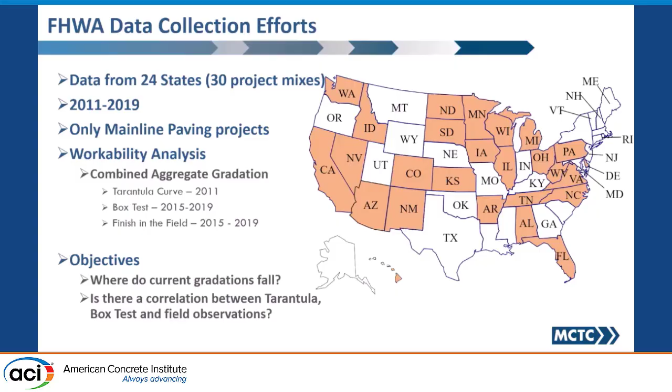So for those of you that are not familiar with the Tarantula Curve, this is not just the new kid on the block, but this is the Elon Musk of concrete gradations. This is something that we've been using for the past 10 years, and we just love it.

So historically, on the concrete side of things, we've always looked at aggregates as coarse or fine. We haven't really put emphasis on combined gradation, and that's what this tool does. Basically, what it is, we would combine all the gradation, and imagine if you're sieving each of the individual sieve sizes.

Once we do that, according to the Tarantula Curve, each of the sieve sizes should meet three different criteria. The x-axis represents the sieve sizes, and the y-axis represents the percent retained, that's the combined percent retained.

The first criteria is each and every one of those sieve sizes should pass, should meet the criteria you see there, the bands that you see there.

The second criteria is the coarse part of your fine aggregate, from number 8 to number 30. If you add it together, it should be between 15 to 40%. Similarly, the fine part of the fine aggregate, from number 30 to number 200, if you add it together, should be between 24 to 34%.

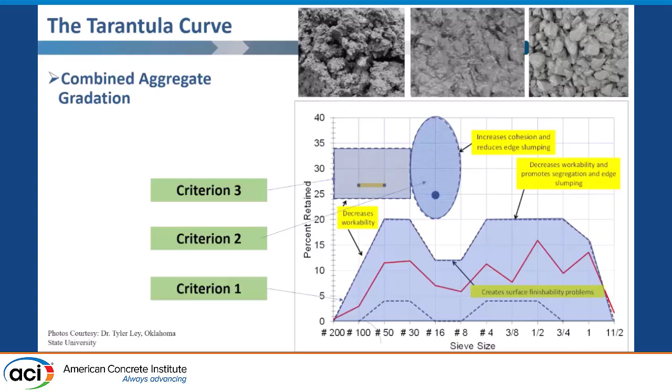Something we've observed is that especially criteria 3 is very, very important when it comes to finishability of concrete.

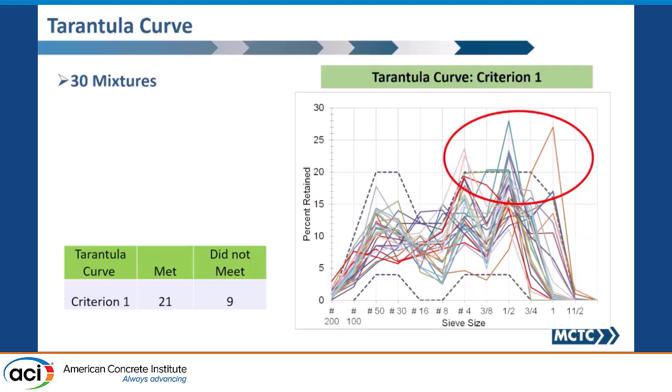When we put all these 30 different gradations together, what we found is actually the majority of them do meet the Tarantula curve. Only 9 did not meet, and even those that didn't, a lot of times it's just one aggregate that's out. So all we really need to do is tweak our blend a little bit and it would fall within the Tarantula curve criteria. The second criteria, the majority actually meet, and it's quite easy — it's very rare that I've seen that criteria not being met.

The third one is basically your fine sand — how fine is your fine aggregate? You want to ensure that you have an adequate amount of fines in your mixes.

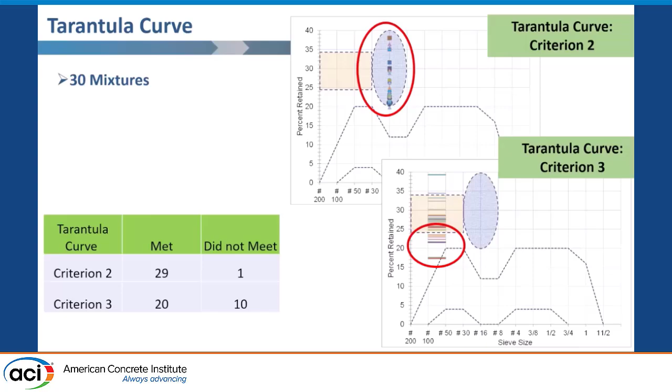But what is the holy grail? Well, the box test is. This is something that's very interesting — it's basically a workability tool that mimics what a paver does. It's a one foot by one foot by one foot box.

You dump concrete into the box up to 9.5 inches, take a vibrator with a certain frequency, insert the vibrator into the box — 3 seconds as it goes in, 1, 2, 3 — and then 3 seconds as you pull it out. Then immediately remove the formwork and you're going to see a cube like that.

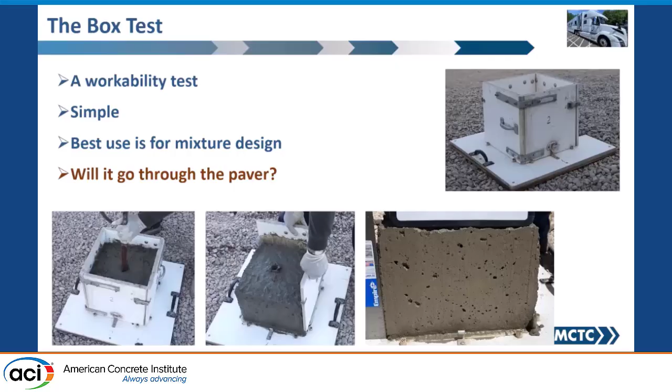Based on the surface of the cube, you can rank it 1 to 4. 1 being ideal from a consolidation standpoint — no issues, great finish, and that kind of thing. And 4 is your nightmare — you wouldn't want to use such a mix.

On the other end of the spectrum, you also have edge slump. Paving mix is very unique in the sense that not only should it be flowable enough where you would not have any consolidation issues, but it should be stiff enough to still hold an edge. So it's like a balancing act.

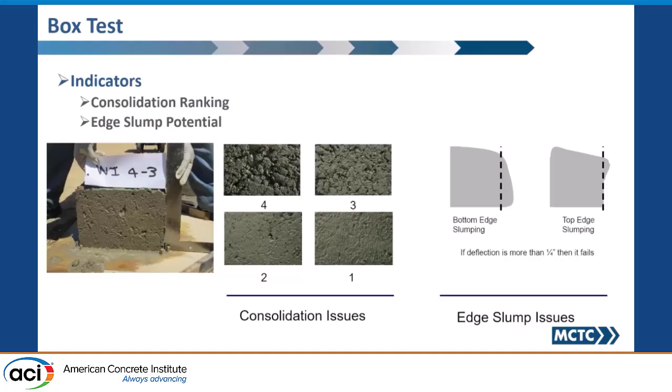If you see edge slump, usually a top edge slump means you have too much admixture or too much water — you should be able to address that in the field. But if you have a bottom edge slump, that means your aggregate gradation, your blend, is not adequate. So no matter what you do in the field, you would still have issues — that's a mix design issue.

With the Tarantula curve, we were able to go back and look at all these 30 different mixes. But with the box test, we actually started using it in 2015 onwards, so we didn't have a chance to run the box test on all 30 mixes. We were able to run it on only 19 mixes.

So of those 19 mixes — what you see on the x-axis is the project number, that may not mean much to you, it's just a project number. On the y-axis, you have the average box number rating, the box test rating.

If you remember, 1 is ideal, right? 1.5 is still good, you can still work with it, no issue. But anything over 1.5 is not ideal. So what I'm going to do is run through a few examples of bad box tests, good box tests, and then the corresponding Tarantula curve for those mixes, along with some photos from the field.

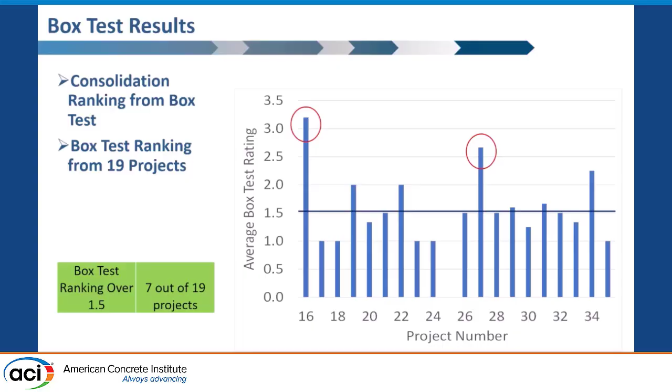So the first one is this project on the west coast of the US. I forget what state it is.

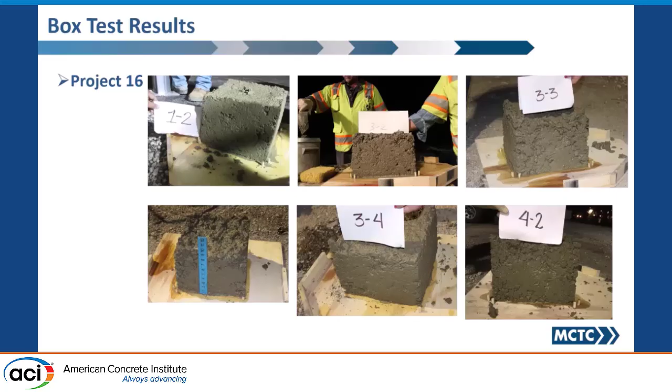When we went to the field, this is what we saw. Now imagine this is a $25 million paving job, right? And this is what we've been seeing consistently throughout the pavement. And again, to show you the box test, this is how it looks.

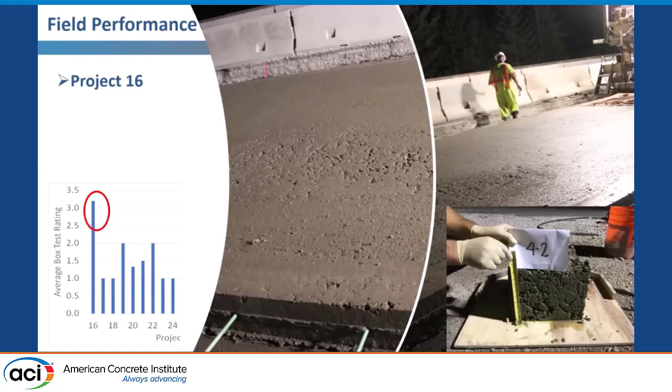So if you look at the reasons why this has happened, well, the mix had a lot of flat and elongated particles, but that's not the primary reason. The primary reason is, if you look at the fine aggregates, they actually have 4 aggregates in their mix. 2 of them are fines, but the fines were not fine enough. So all they had to do was replace one of the fine aggregates with a finer aggregate. That's all they had to do, and it would have solved the problem.

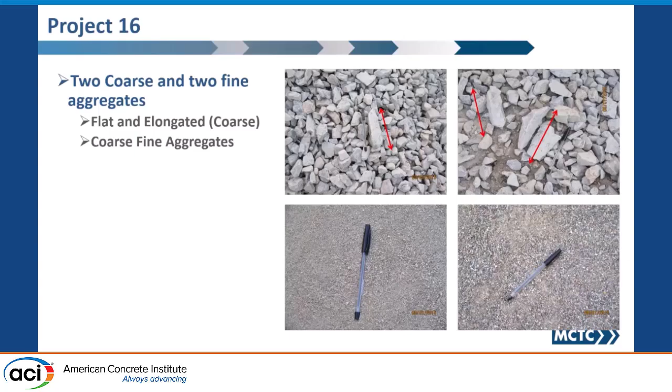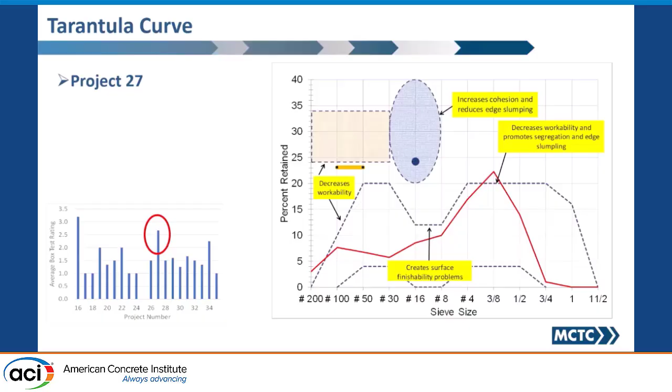Another project, this is also on the West Coast. Again, not enough fines there. It also did not meet the other criteria as well. And this is what we saw.

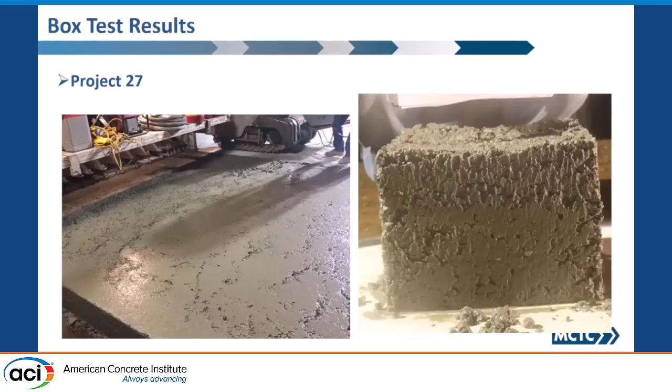Would you want to have this on your job? So you know what the contractors were doing to address this? They were using water literally after every truckload. And that's basically all. What would that do to your pavement? All the good stuff would come up, right?

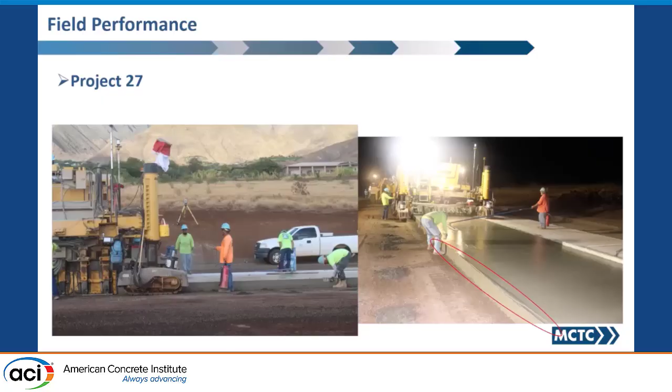And what's going to happen to the durability of your pavement now? So all they had to do is just tweak the mix initially, and they would have addressed this problem.

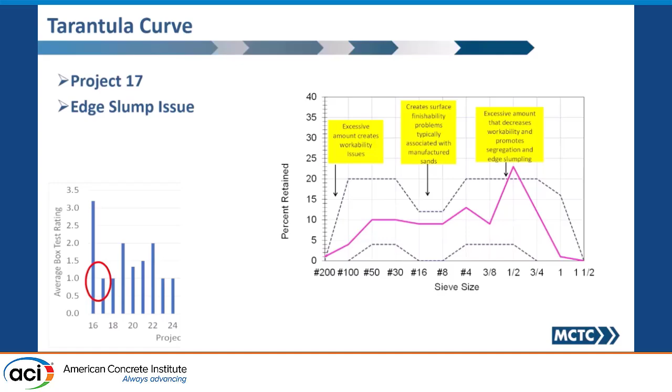Now, on the other end of the spectrum, we have edge-slump issues. Again, another mix where the box rating, the consolidation rating, was great, but the Tarantula curve indicated that you're going to have edge slumping. And sure enough, that's exactly what we saw in the field.

So my point here is, the Tarantula curve gives us an idea. It's a guide for us to design our gradation so that the likelihood of workability issues happening are reduced. But like I said, it's not the holy grail. It's a guide. But to ensure that you won't actually see that in the field, you have to run the box test during mix design.

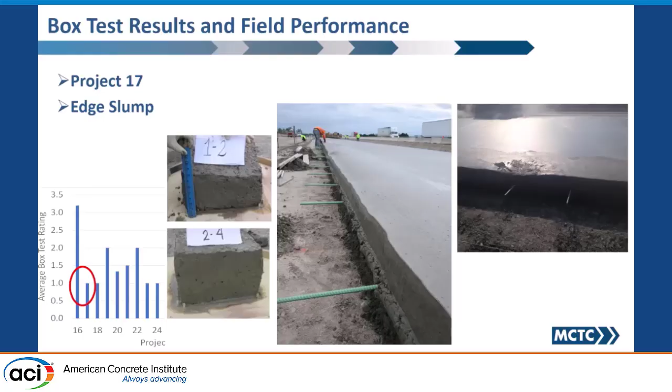And if the box test says everything is good, I'm going to go ahead and submit that mix design to the state or the owner, whoever that is. If not, even if all your other properties are good, I would still go back and redo my mix design.

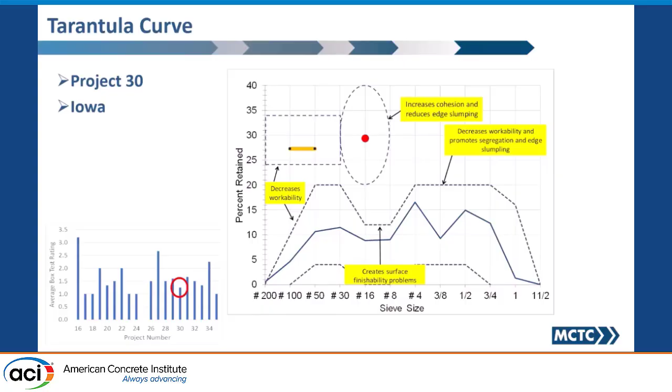So let's look at some good projects. This is from Iowa. Really good Tarantula curve. The box test was good. Again, look at the pictures there. No edge slump and no consolidation issues. And look at the surface.

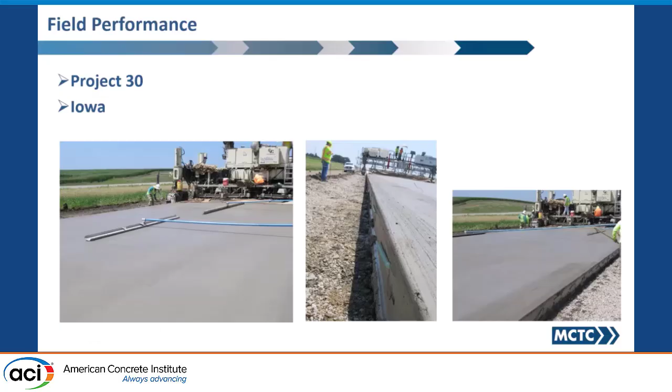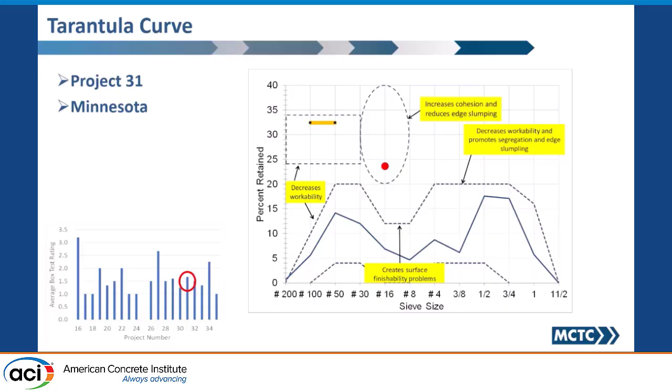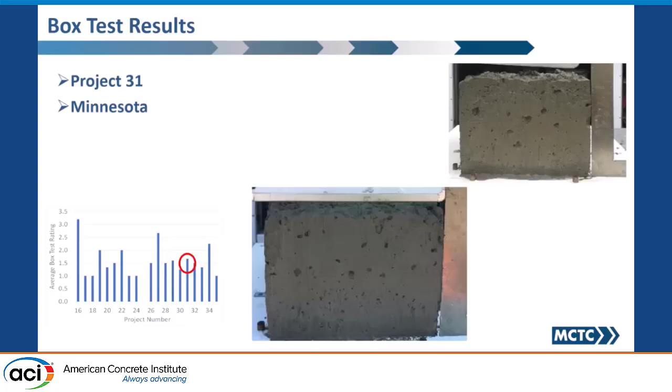This is from Minnesota. Again, all 3 criteria were met. Look at the consolidation as well as the edge slump. Now, you would see some bug holes there. Bug holes are okay, that's no big deal. And this is what the finish looks like. Again, you would notice the bug holes on the finish still.

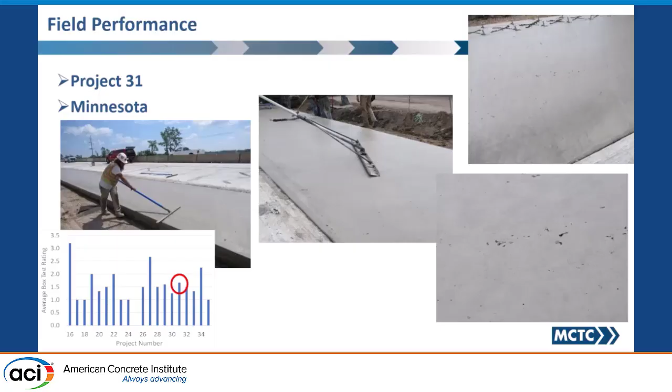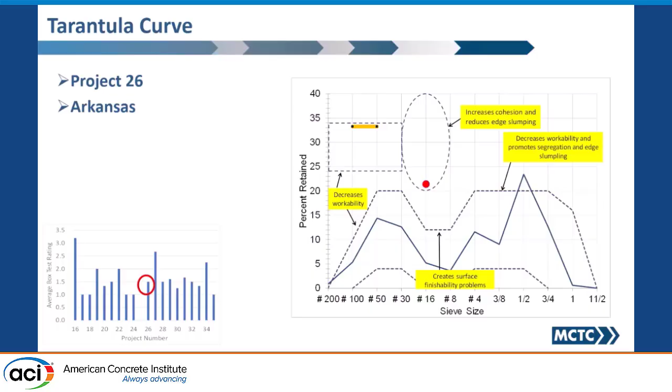But again, with the Tarantula curve, you're only looking at gradation. You're not really looking at how much water is in your mix or how much cement you're putting in your mix. But that's what the box test does for you. So when we ran the box test, it was a perfect box test. And sure enough, that's exactly what you would see in the field.

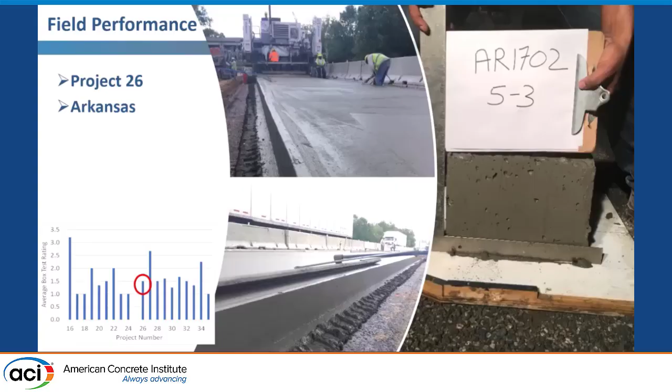So again, contractors in your room, the box test is awesome. It's not designed to be an acceptance test, but it's an awesome mix design tool. You can run it in the field, but the biggest bang for the buck is when you're doing a mix design. In fact, with our mobile lab, as we go to different states, we're recommending state DOTs include it as a mix design requirement. They don't even need to tell the contractor they'll give us a 1 or a 2. All they need to do is tell the contractor to run this, and no sane contractor would provide a mix that would fail the box test.

One of the other things we get a chance to do with our mobile lab is not only demonstrate these things and collect data, but also improve upon existing test methods and give feedback to researchers. So one thing we've done is run the box test at different intervals of time, just to see how workability changes with time.

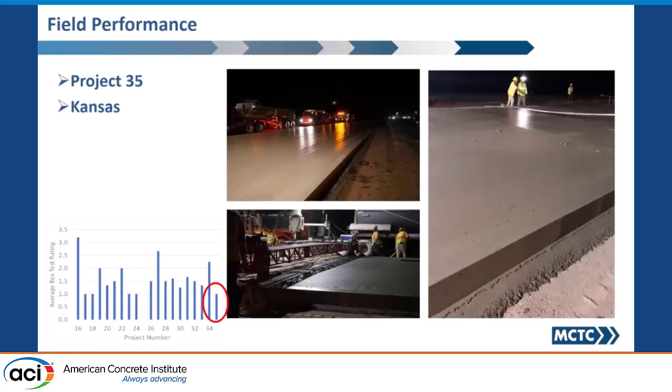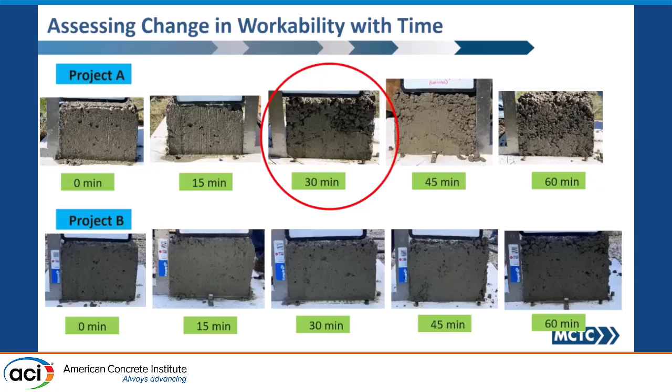Now what this actually did in the field is really interesting. Again, everything you've seen here is real world data, none of it lab generated. This is stuff actually happening in the real world. So when we went to the field for project A, this is what we saw.

In project A, besides the workability issues, it was also a windy place, so that's not helping either. We were having all kinds of issues in the field. The second project was in the same geographical area, and the finishers, just 2 of them, finished the pavement with really good smoothness numbers in the end.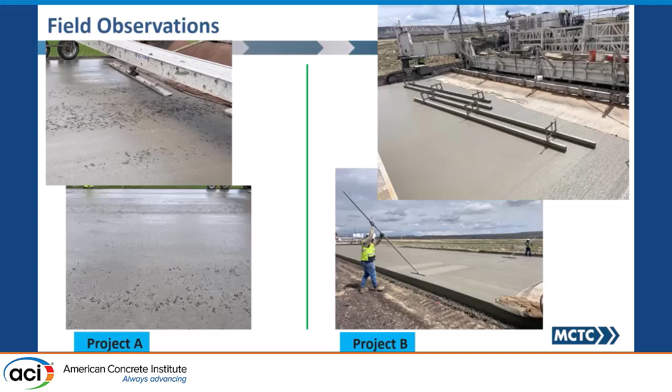So, with that said, my last 2 slides. First, if you have not used the Tarantula Curve, it has 2 versions: one for paving applications, the other for non-paving, meaning structural applications. If you have not used it, I urge you to consider it. You're not going to lose anything by using it. It's just a mathematical spreadsheet.

Sometimes we may have really bad aggregates and may not be able to do much. We may need to get an extra aggregate to help with workability. But sometimes we're restricted with the aggregates we have and have to work with what we have. The question is, are we really maximizing the aggregates we actually have? That's what we could check with the Tarantula Curve.

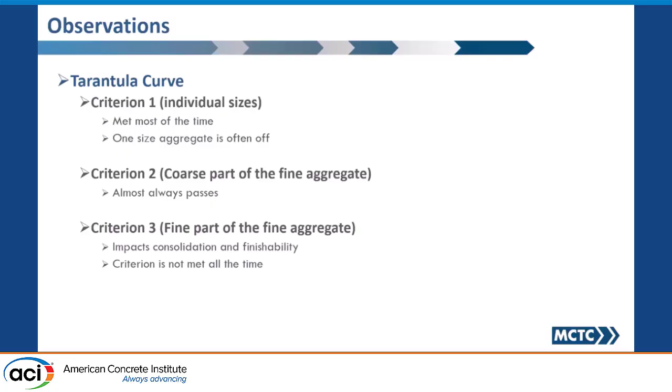Meeting all 3 criteria is not a big deal, but I'd urge you to make sure the fine part of the fine aggregates, criteria 3, is always met, because in my opinion that's probably the most critical one. Our observations show the Tarantula Curve, the box test, and field observations all correlate to each other in almost all cases. The box test surface finish correlation is excellent to what you'd see in the field.

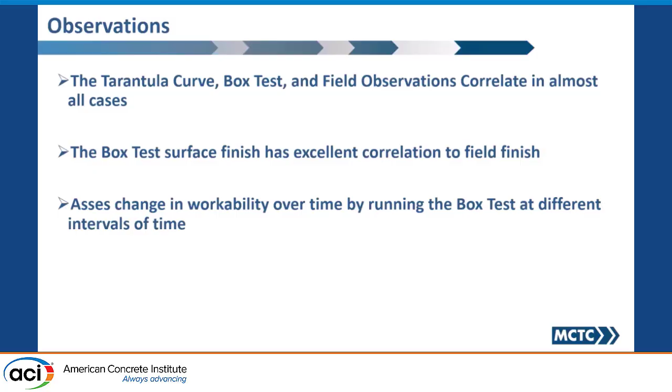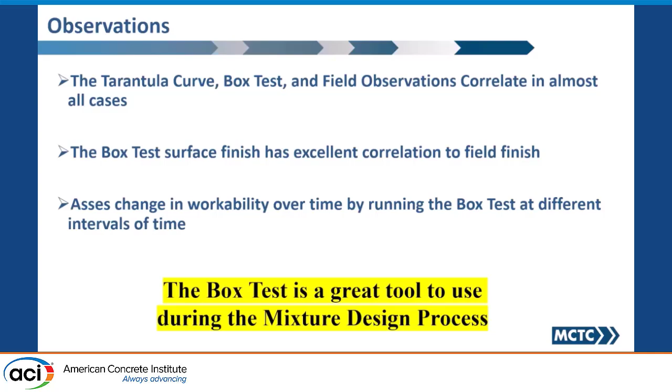And finally, if you have haul distance issues, or want to experiment with different admixtures to see how long your mix stays workable, you can run the box test with all kinds of combinations at different intervals of time. In the end, it's a great tool for mix design. Again, it's really not something designed for the field, it's primarily for use during the mix design process to get a better optimized mix. So with that, happy to take any questions if you have time.